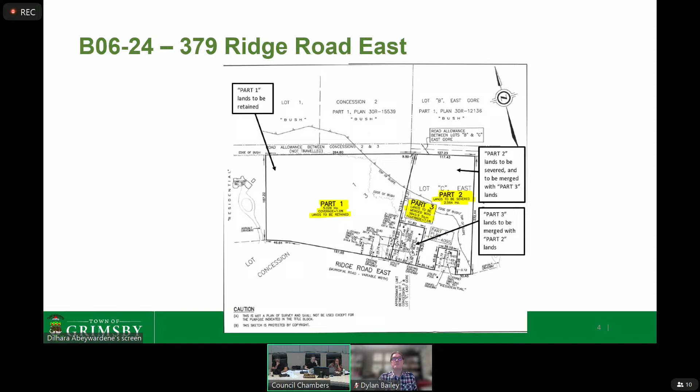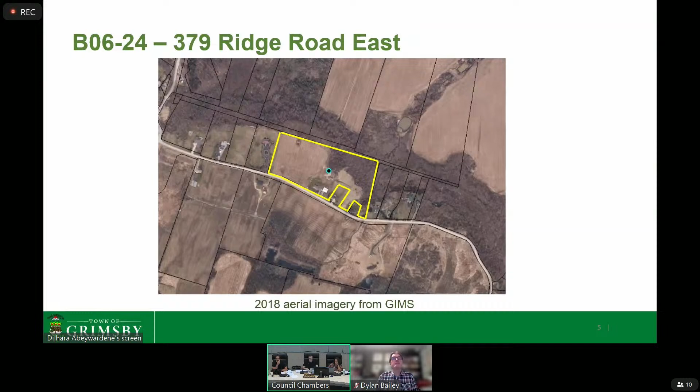This is an image of the site plan, which was circulated along with the notice of hearing. This is an image of the neighborhood for context. These are the current conditions on site.

Correspondence for this application has been received from these agencies, and I will summarize that correspondence now. Planning staff have no objection to the severance proposed by the applicant and support the conditions set out by the NEC through the conditional approval. In addition, the following conditions that usually apply to consent applications will apply.

Number 1, that the applicant provide the Secretary Treasurer with deeds in triplicate for conveyance of the subject parcel, a registrable legal description of the subject parcel, together with a copy of the deposited reference plan, if applicable, for the issuance of the certificate of consent.

Number 2, that the final certificate fee payable to the Town of Grimsby be submitted to the Secretary Treasurer.

Number 3, that all conditions of consent be fulfilled within 2 years from the date of the notice of decision pursuant to subsection 53(41) of the Planning Act, failing which this consent shall be deemed to be refused.

And number 4, subsection 3 or 5 of section 50 of the Planning Act, RSO 1990, shall apply to any subsequent conveyance or transaction involving the severed land.

Public Works staff have no comments or conditions. Niagara regional comments provided for the NEC application remain applicable to this consent application, as the configuration of the proposed boundary adjustment is the same. The summary of the comments provided for the NEC application state that Regional Growth Strategy and Economic Development staff do not object to the proposed NEC development permit application, provided town staff are satisfied that the proposed boundary adjustment can be considered for legal or technical reasons, and that NEC staff are satisfied that the application conforms to NEP policies.

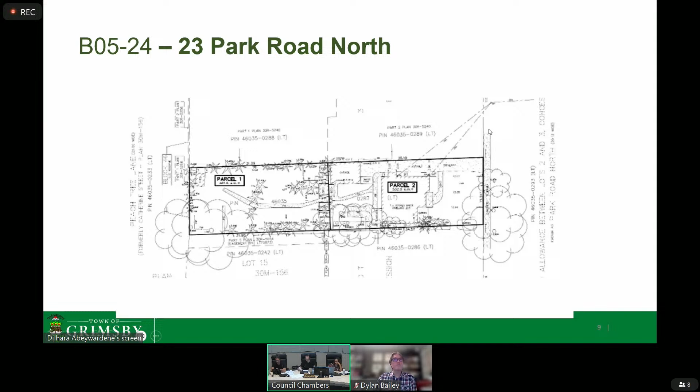This is an image of the site plan which was circulated along with the notice of hearing. This is an image of the neighborhood for context.

It's an aerial view of the current conditions on site.

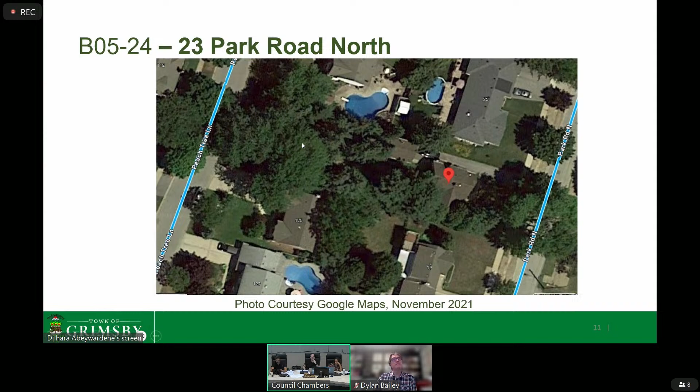These are the agencies that have provided correspondence regarding the consent application, and I will summarize that correspondence to you now. Planning staff have no objections to the approval of the severance proposed by the applicant, subject to the conditions below.

Number 1, that the address change fee be submitted to the Town of Grimsby for municipal addressing to be assigned to the severed lot. Number 2, that part 1 be dedicated as a public highway.

Number 3, that concurrent minor variance application A3224 be approved with conditions. In addition to these conditions, the usual conditions for a consent application that were read out for the previous application would also apply. Public Works staff have the following comments.

Town staff note this application is being reviewed concurrently with minor variance application A3224 for 23 Park Road North. A town services permit will also be required for installation of services once the plan is approved. An entrance permit from the Public Works Department will be required for the construction of all new driveway entrances. All proposed entrances shall be reviewed and approved by town staff and be constructed in accordance with town standards.

They also have 2 conditions. Town staff will require a site servicing plan showing both the existing and proposed site services for water, storm, and sanitary for both parcels. The plan is to include location, size, material, grade, inverts, etc. from the municipal main to the building face for all services. Please be advised that only 1 service connection per lot is permitted per town standards. Service locations need to be field verified by the applicant, locations and elevations.

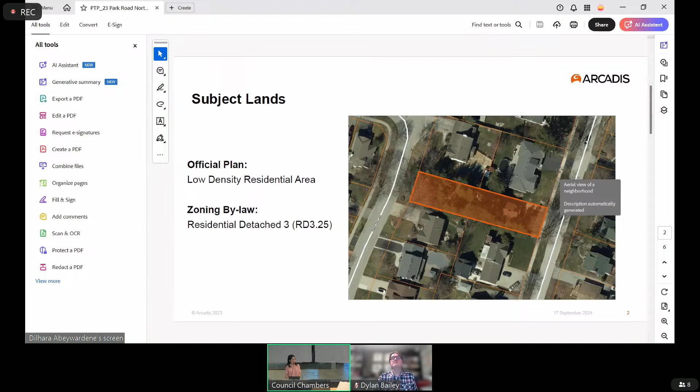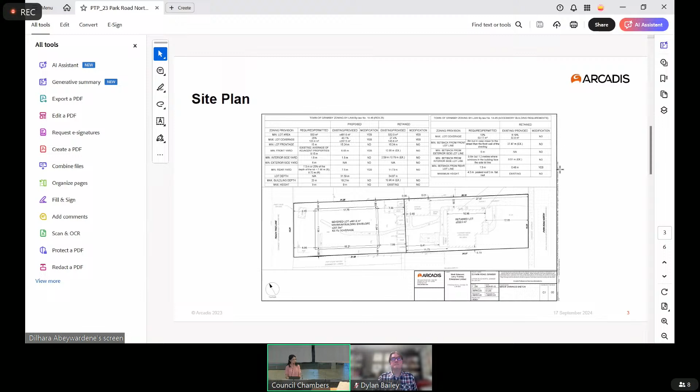As previously mentioned, the purpose of the consent is to sever the subject lands and create one new lot fronting onto Peachtree Lane. Parcel 1, which will front onto Peachtree Lane, will have a lot area of 482 square meters, whereas Parcel 2, which will remain with frontage on Park Road North, will have a lot area of 532 square meters. Next slide, please.

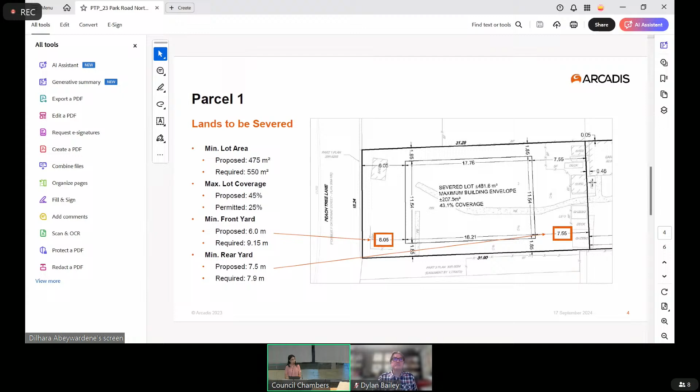To facilitate the proposed consent, minor variances will be required for Parcel 1, which is to be severed. We do require variances for the minimum lot area, a reduction, an increase to the maximum lot coverage, a reduction to the minimum front yard, and also a reduction to the minimum rear yard.

We do respectfully request staff to approve these applications, given that the proposed applications maintain the character of the low-density residential neighborhood. As well, they do not cause any adverse effects to the surrounding properties in terms of massing, shadow, and privacy.

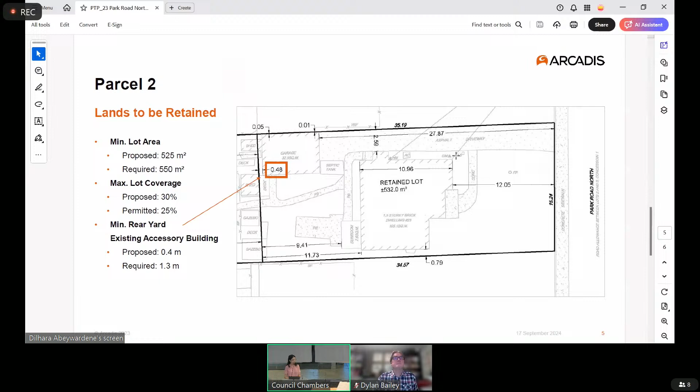Thank you. Any questions from the committee on either of the applications? Seeing none, is there anyone in the audience that wishes to speak to this application or the applications? Okay, come on up. Just give your name and address for the record, please.

My name is Josh Vandermeulen. I live at 125 Peachtree Lane, the property adjacent to the severance to the north. I'd like to thank Council and Chair for offering me the opportunity to speak.

I have two main concerns regarding this. Number one is the easement that exists between the two lots. It's a concern for me because of the grade. I don't know how the grade is going to be adjusted for the new property and how that's going to affect the easement. We have services running through the easement that are very shallow. So if the easement needs to be removed or re-leveled, I'm concerned that it will be at an expense to us, or it will affect our water drainage.

The second issue that I have is previously behind us, a 2.5-story structure was built on the property line. The building permit that this individual attained, this is the house behind us, was for a garage. It turned into a fully occupied 2.5-story house. It's built on the property line, it has windows facing us. The water spills onto our property and our neighbor's property. There are no eaves troughs on the house, and it is built on slab.

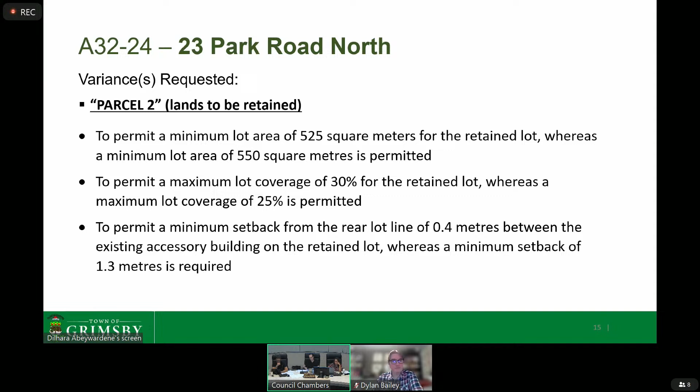And this is an image of the site plan, which was circulated along with the notice of hearing.

Correspondence for the minor variance application has been received by these agencies, and I will summarize that for you now. Planning staff have no objections to the minor variances proposed by the applicant, subject to the condition that final approval of concurrent consent application B0524 be obtained. Public Works staff have no concerns or conditions. The region has the following comment: no review required if servicing is confirmed to be from Peachtree Lane; however, should services come from Park Road North, regional staff will require review of the consent. I have personally confirmed with Public Works that servicing will be from Peachtree Lane. The NPCA has no comments in regards to this application. Back to you, Mr. Chair.

Okay, thank you very much. Does the agent want to add any further comments? Okay, thank you. Is there anyone from the committee who has any questions or comments?

Dylan, go ahead. Thank you, Mr. Chair. Just two quick things on that. First of all, the rear yard setback of, I believe it was 0.4 meters versus the 1.3, which is standard - it just seems like a very small distance, and so I just wanted to point that out. There's not a lot of room. Should there be any need for servicing that accessory building, it seems a bit tight in my opinion.

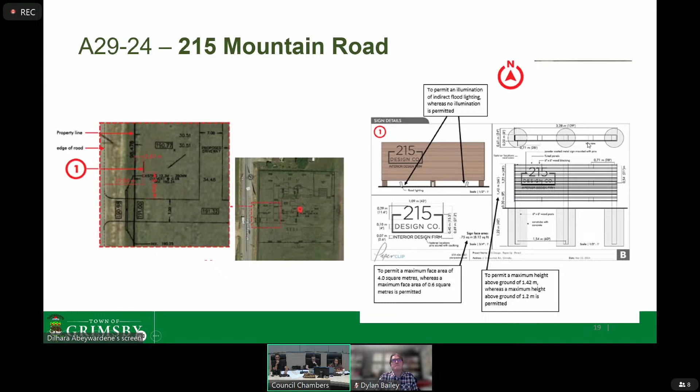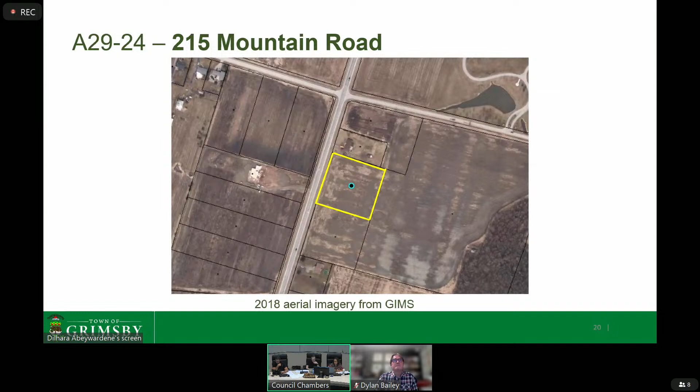This is the plan that they have in mind, which was circulated along with the notice of hearing. This is an image of the neighborhood for context, and these are the current conditions on site, although the sign is pre-existing up front.

These are the agencies that have provided comments, and I will summarize those for you now. Planning staff have no objections to the approval of the minor variances. The variance meets the intent of the official plan and zoning bylaw, is desirable and constitutes appropriate development of the subject site, and is considered minor in nature.

Public Works staff have no comments or conditions. The region and the NPCA have no comments in regards to this application. Back to you, Mr. Chair.

Okay, thank you. Is the agent or the applicant for this present? Hi, I'm Tanya Andrews, the agent for the applicant. My name is Tanya Andrews and the firm address is 12 Bel Air Road in Brantford, Ontario.

Do you have any further questions or comments about the staff report, any of the comments raised, or the application itself? It seems that it is in favor.

We were just going to state that the main purpose, as mentioned in the letter provided, is that the sign and structure are for safety and visibility, with the actual business copy itself being less than 0.4 meters squared of the entire area. We feel the safety aspect is the main point. The structure is covering the 2-foot gas pipe visible in the image of the home on the property, providing blockage for anybody cutting the grass or kids playing on the property.

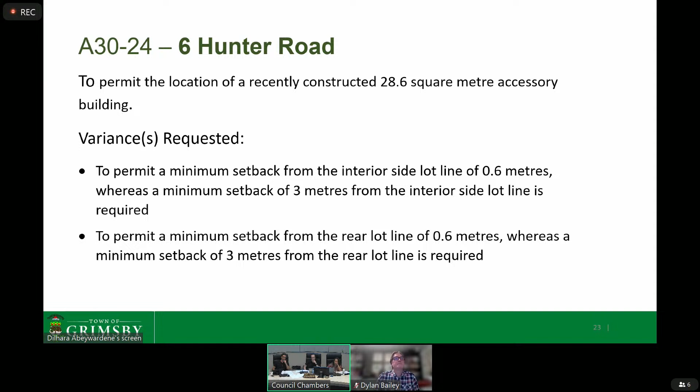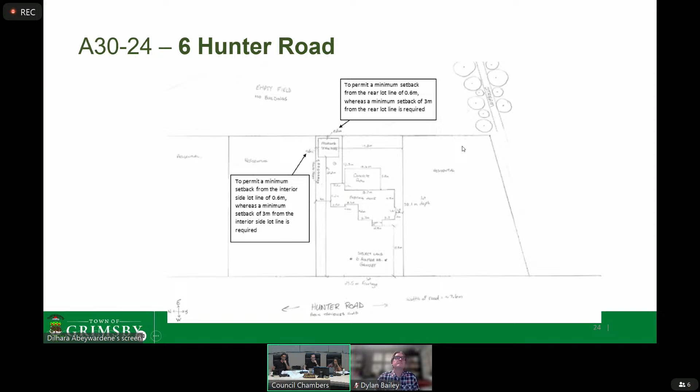This is an image of the site plan, which was circulated along with the notice. This is an image of the neighborhood for context. These are the current conditions on site.

These are the agencies that have provided comments, and I will summarize those comments for you now. Planning staff have no objections to the approval of the minor variances. The variance meets the intent of the official plan and zoning bylaw, is desirable and constitutes appropriate development of the subject site, and is considered minor in nature.

Public Works staff offer the following comments. Public Works staff notes any swale within the side yard setbacks may be challenging to design or construct due to the constraints. The typical standard for a swale is 0.9 meters in width. However, this will still need to be approved through the lot grading and drainage plan requirement. Please be advised that as per town standards, the required side yard swale width is 0.9 meters minimum. Staff require that the side yard swale remain unobstructed and unencumbered. That includes hardscaped pathways.

And they have one condition. Town staff will require a lot grading and drainage plan demonstrating the existing drainage patterns for the lot and at a minimum 5 meters beyond the property line. The location and direction for all proposed downspout discharge points shall be shown on the plan.

The region and the NPCA have no comments in regards to this application. Furthermore, we have received 2 letters of support towards this application, from Mrs. Henry Vanderwint at 4 Hunter Road, which was attached to the agenda, and from Emily and Glenn Thompson at 8 Hunter Road, which I will read out now.

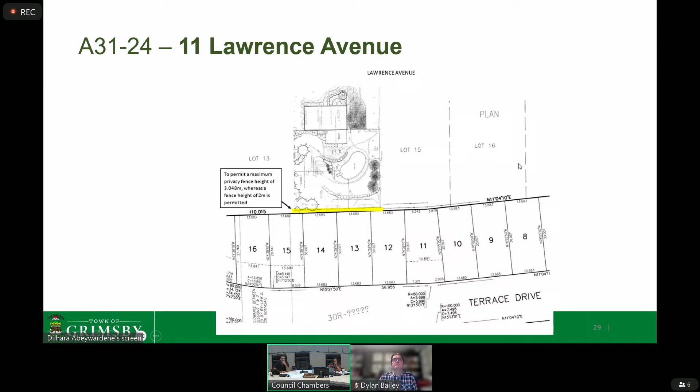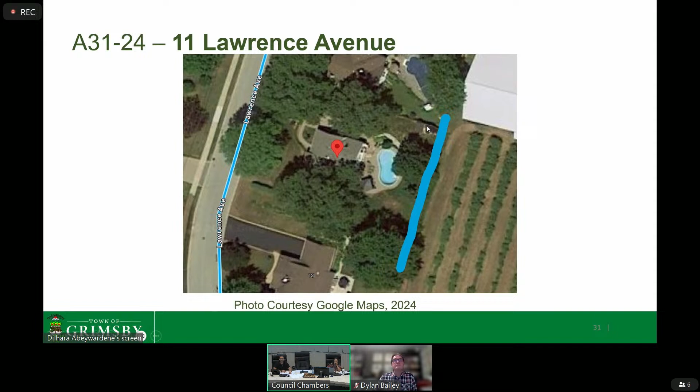This is an image of the site plan, which was circulated along with the notice. This is an image of the neighborhood for context. This is an aerial view of the current conditions on site, and the fence is to be erected where this thicker blue line is. The proposed fence, rather. And these are the agencies that have commented on the application, and I will summarize those comments for you now.

Planning staff have no objections to the approval of the minor variance. The variance meets the intent of the official plan and zoning bylaw, is desirable and constitutes appropriate use of the land, as it would assist in the maintenance of privacy for the subject and neighboring lands without creating a significant negative impact on the neighboring properties, and is considered minor in nature.

Public Works staff have no comments or conditions. The region and the NPCA have no comments in regards to this application.

Furthermore, we have received two letters from neighbors, one of which favored the application from Donald and Annette Gibbons at 9 Lawrence Avenue and was attached to the agenda, and the other which is a letter of opposition from Elise and Jerry Bulligan at 121 Terrace Drive, and they are here in person, I believe, to speak to the application. And if not, I can read the letter out. Back to you, Mr. Chair.

Thank you. Is the applicant here that could come to the lectern to speak to this application, please? And please state your name and address for the record, please. Thank you.